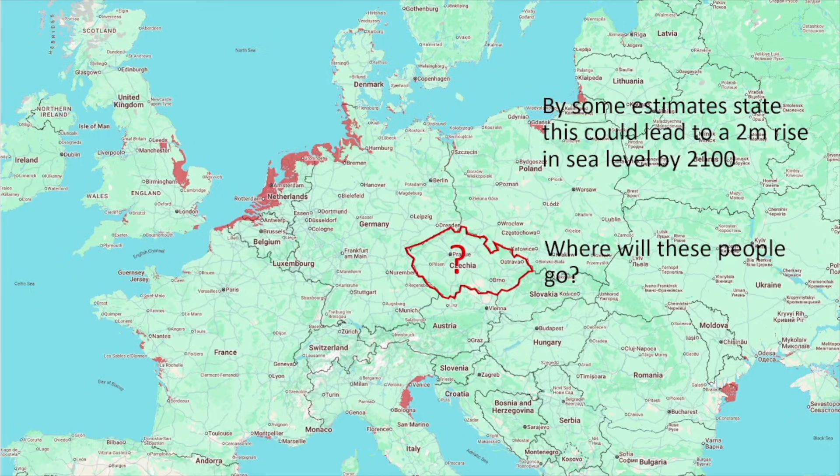And we have some beautiful areas here. We have the Venice lagoon with all that architectural heritage and the amazing nature as well. Will they come here? One of the big challenges of the next century isn't going to be imperialistic wars or mineral grabs for territory. It's going to be migration. It's going to be people moving around the world to escape the effects of climate change.

Forest fires, this is a global phenomenon. They're growing in intensity and frequency. And the impacts of forest fires are huge: massive biodiversity loss, and it's all because of temperature rises, lower rainfall, and increasing wind speeds. So the disruption is huge: flight disruption, air quality impacts, etc.

The population is growing in the world, we know that. Within the next 5 to 10 years, we'll have 10 billion people on Earth. And urbanization is growing enormously. If we go back to 1900, 13% of the world's population lived in cities. In the year 2000, it was 47%. By 2050, it'll be almost 70% of people.

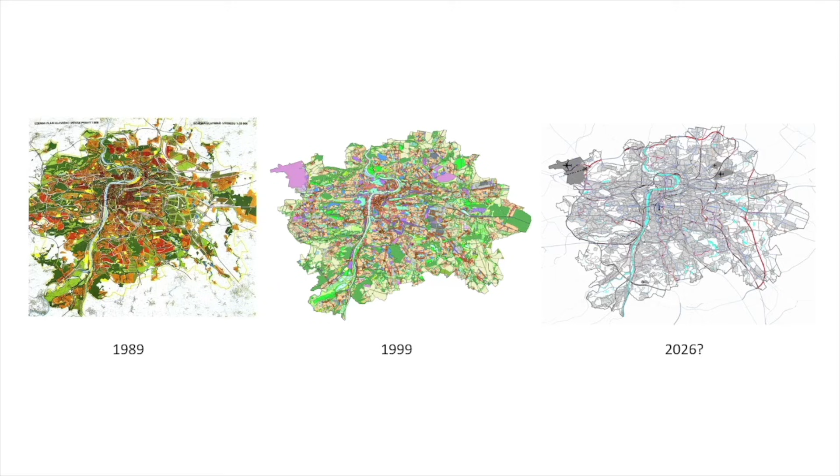You can see a lot of colored spots, and basically those colored spots reflect a land use principle—it defines where we put certain functions. So we put housing here, schools here, factories here, and then we have to build a big network of transportation to get between where you live, where you work, and where you go to school. And as that becomes full, we grow outwards, and the city continues to expand horizontally.

And this is a problem. This is an extract from the latest master plan, which has been developed using all the latest digital technologies and vast amounts of data available to the master planners, which is incredible.

Just for comparison, the density of the city is an important consideration. In Žižkov, to the east of the city center, we have a density of 23,000 people per square kilometer—that's the densest part of the Czech Republic. And in the city center, we have 4,700. So you can see maybe there's an opportunity, maybe we're missing something. Instead of building on a field, on cheap or agricultural land on the edge, why don't we build in the center?

And then we can make some big advances in how we plan cities. Just for comparison, in case you think Prague is a busy and dense city, if you look at Barcelona or Paris, they are more than double the density of the most dense part of the Czech Republic. So let's have a bit of a closer look.

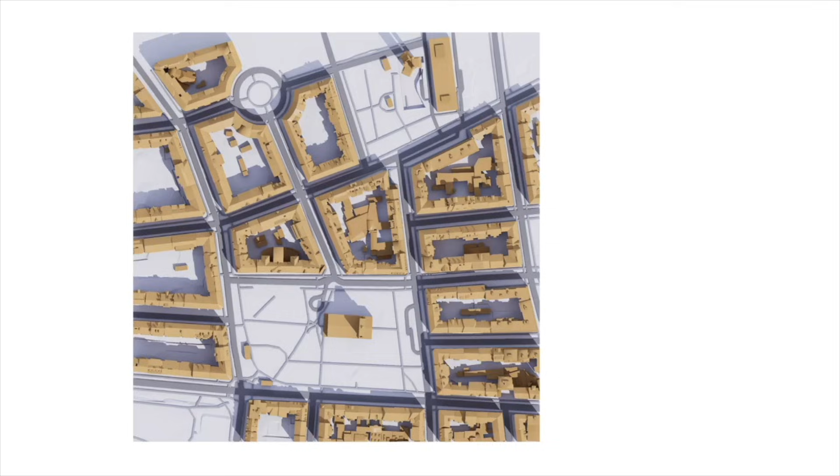Let's have a close look at one little piece of Prague. You might recognize this, it's náměstí Jiřího z Poděbrad in Žižkov, on the border of Žižkov and Vinohrady. Let's turn this so you can see what the city's really made up of. The buildings themselves - let's lift them up so you can see them more easily.

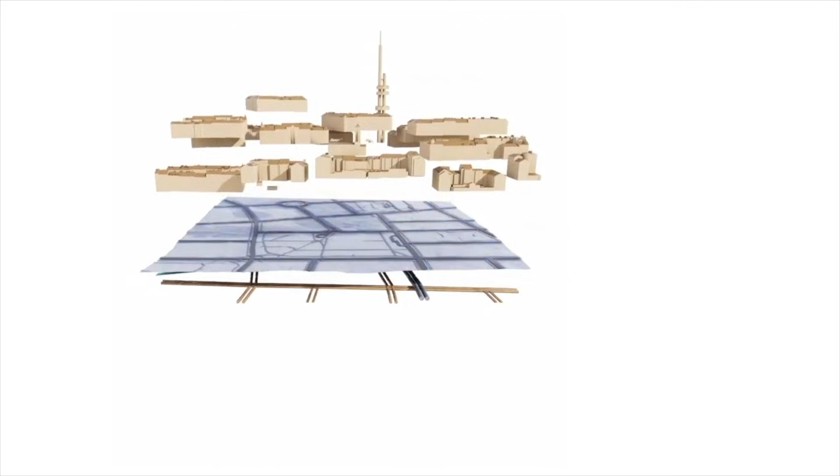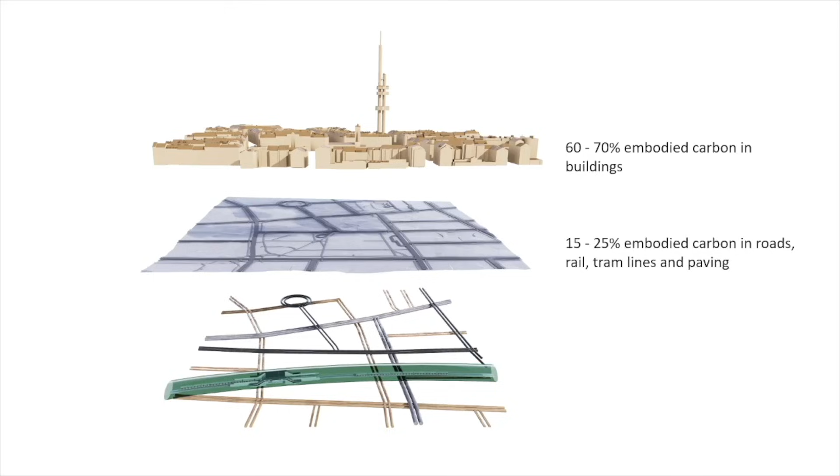The buildings make up roughly 60 to 70% of the embodied carbon of the built environment. Then you get the roads, pavements, and city squares - all these surfaces make up about 15 to 25% of the embodied carbon. Below that you get the underground infrastructure, tunnels and utilities. Prague loves tunnels, we have many tunnels - it's a hilly city, so this is probably much higher in Prague.

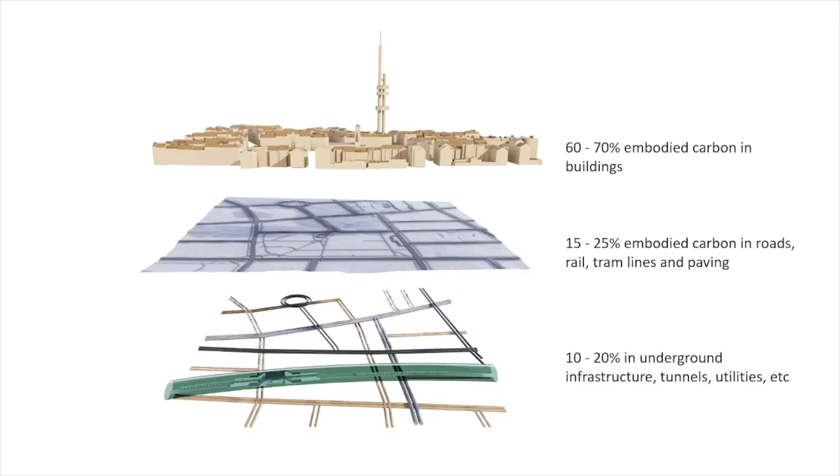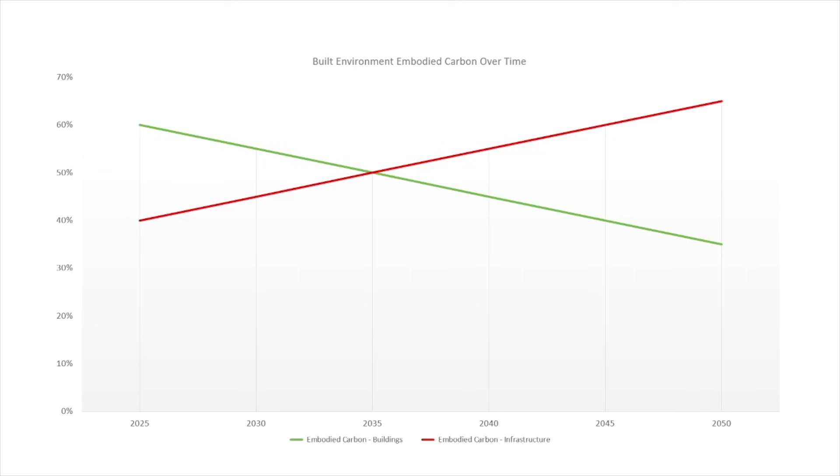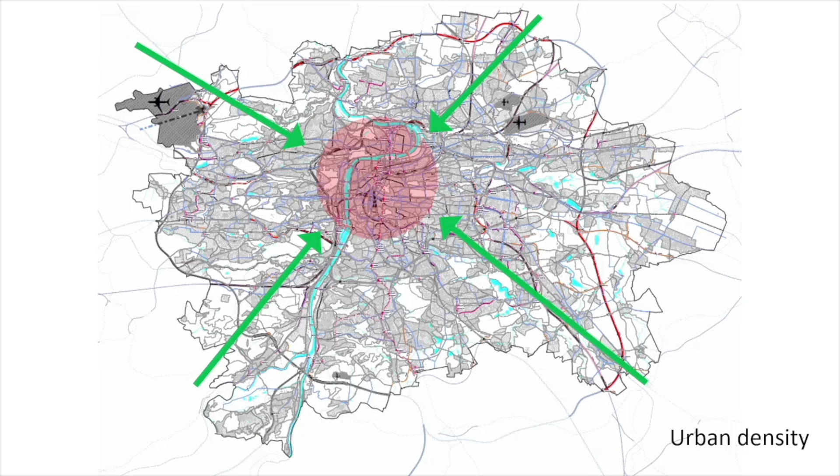We need to build compact cities, low-carbon compact cities. We need to resist this temptation to grow out, and instead we need to grow in. We need to incentivize people to do this - so how do you persuade people to build in the city center? By doing so, you make everything better for everybody: cheaper, easier to travel and get around the city. Knowledge sharing is better, businesses close to each other perform better, there's innovation.

So a couple of thoughts to add to that, to make it a little more complex. The EU is bringing in a new emissions trading system, which will basically tax inefficient buildings. If your building uses a lot of energy, you'll have to pay a lot more for that energy. And what do you think the tenants in those buildings will do? They'll say, I'm not going to pay this, so I'm going to move out. Then the landlord will say, but I can't pay to fix my building because I don't have any income.

What's a big danger is that we're going to get a ring of buildings around the city center. The city center will be nicely preserved - these buildings will be like museums and galleries, subsidized by the EU and the government. And then around that, we could get old buildings, maybe or maybe not historical, maybe protected, but too expensive to work in, to live in, and too expensive to repair. So there's a big danger.

So we need to incentivize people to fix those buildings. If you look at the map here, the red areas are tall buildings in the master plan, and the gray areas are where there are low buildings. I'm not suggesting we build tall buildings in that central part, but I think there may be a strategy, there may be a solution. That's the UNESCO protected zone, just for interest.

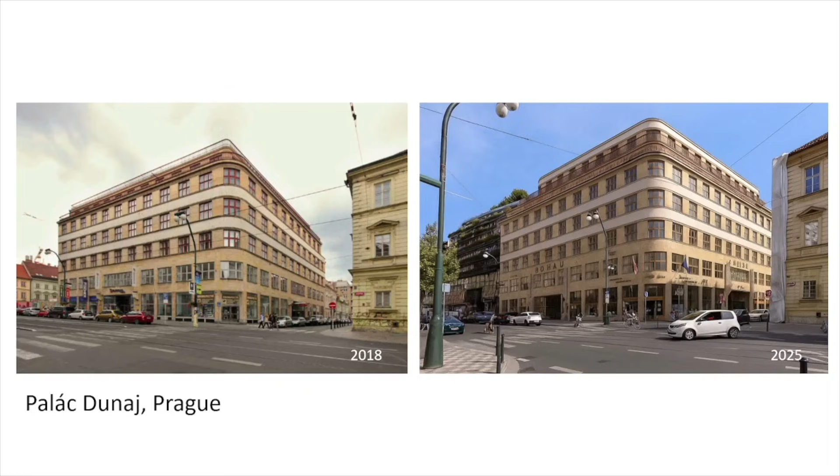So there are many opportunities. When heritage authorities tell us we can't change existing heritage buildings, don't believe them. It's wrong, and it's very destructive for the future of the city.

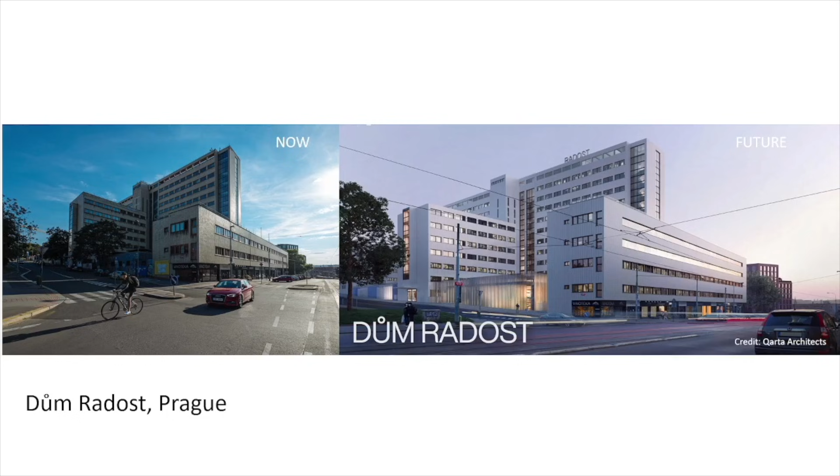This is a great project as well, in Žižkov, a very densely populated area. It's a building from the early 1930s, was an office building, and it's being turned into flats. There will be 600 apartments for key workers and students, affordable rented housing, and they've added a couple of floors on the street side. But you wouldn't believe the pressure from heritage to stop that development, and yet this is exactly what we should be doing in our cities.

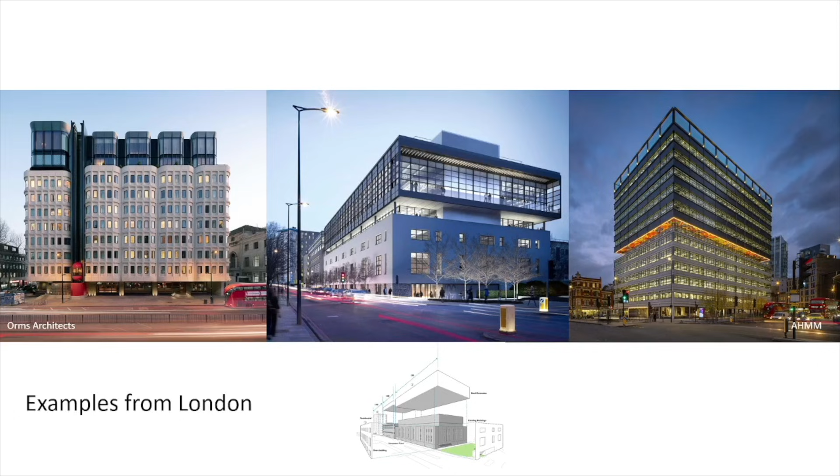A couple of examples from London. London's a very dynamic city, and people approach things in a slightly more creative way. You can do incredible things when you go up. Prague has some good precedents as well, so there's no reason why we shouldn't be able to do it.

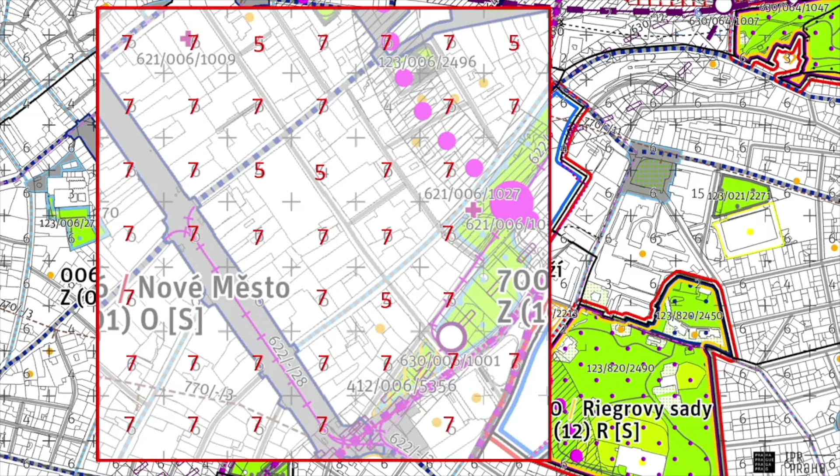I'll quickly fly through this. This is the master plan of Prague as it is now, the new one which should hopefully come into effect in the next year or so. If we zoom in, we can see numbers on those little squares, those numbers are floor heights, the number of floors you can build. My simple proposal is just add one to those numbers, and make it so people have to build another floor—in fact, if you don't build another floor, you don't get your permit. So you flip the argument completely round.

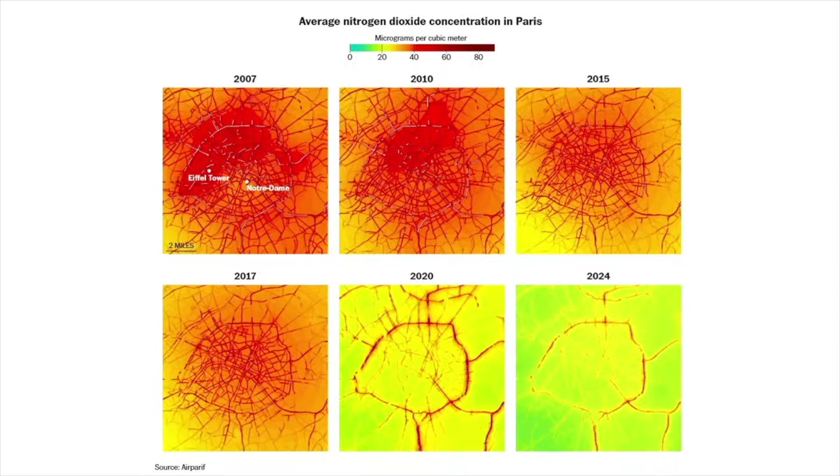When you densify the city, you have to do other things too—make sure it's livable and an attractive environment. This is an air quality map of Paris. Over the last 10 to 15 years, the mayor of Paris has undertaken measures like pedestrianizing 300 streets in the city center, adding 200,000 trees, and banning parking for SUVs, and everybody loves the results. They are steadily greening the city and making it dense and resilient. Paris is twice as dense as Prague, so when we build, we need to build green in our cities.

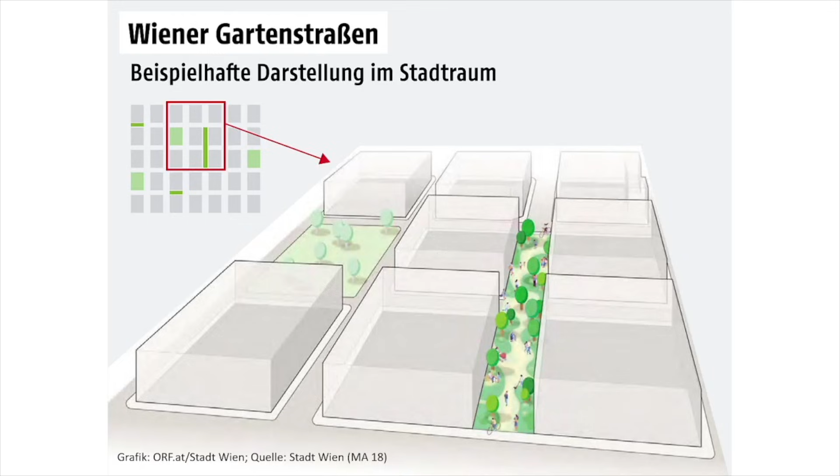We need to build on the roofs, green facades, green trees in the streets, and green zones. Vienna is another great benchmark—every other street in the residential districts has a pedestrianized street with greenery, these are the garden streets in Vienna. Fantastic precedent which we should be doing here. Imagine Vinohrady, every other street like this. I think we need to do this.